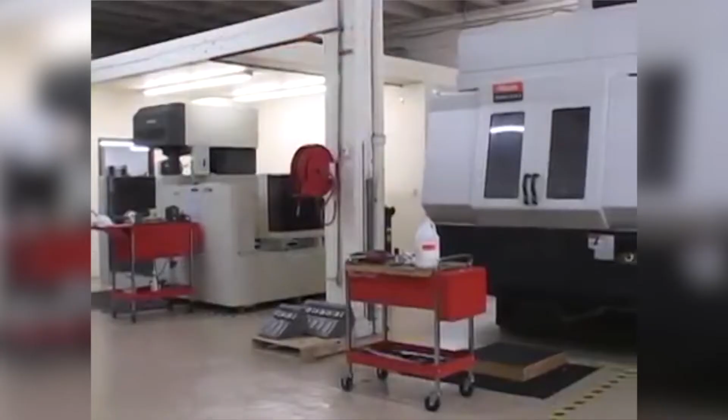Five-Axis Industries and sister company Ellstrom Racing trace their roots back to 1960 as part of the Ellstrom Manufacturing Company. Started by Erick Ellstrom Sr., the company established a legacy of innovation, performance, and a winning attitude that is apparent today.

Ellstrom Racing came on the scene in the early 90s to dominate the highly competitive, high-risk sport of unlimited hydroplane racing. These 30-foot powerboats, weighing over 7,000 pounds, are more like airplanes than boats. Most of the time, the propeller is the only part of the boat that is in the water.

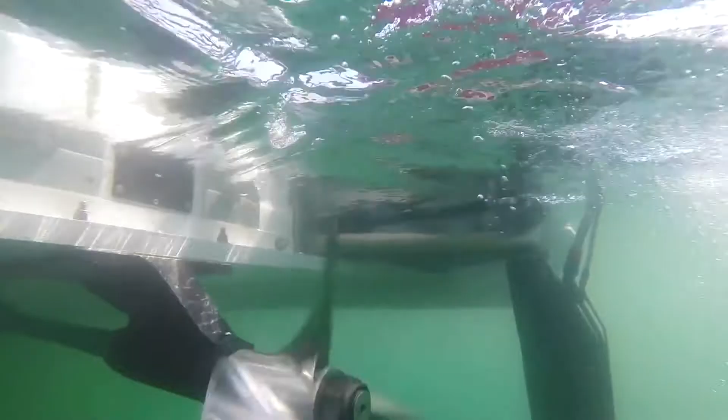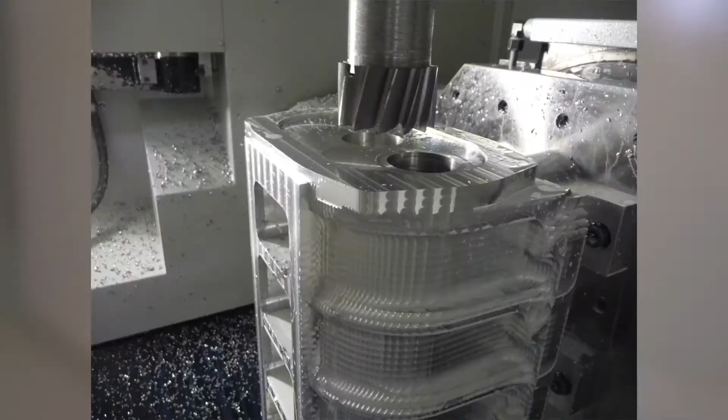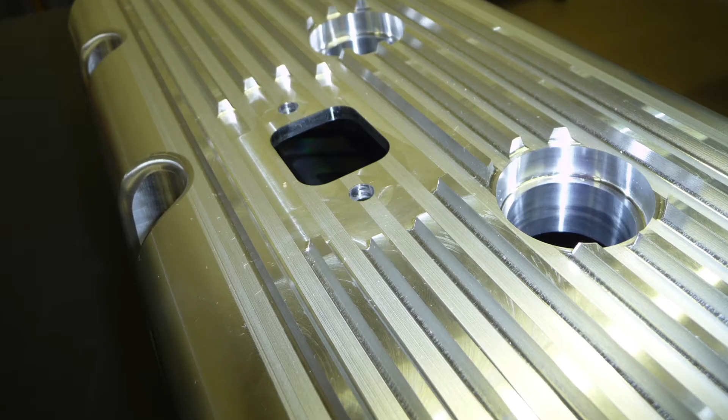When it came to raising the bar on the status quo in unlimited hydroplanes, Ellstrom Racing knew they needed to innovate and improve the design and manufacturing of high-quality components that stand up to the demands of the sport. So they started Five-Axis Industries, which in the beginning was essentially a hobby shop capable of making difficult-to-manufacture parts from hard metals, including titanium and stainless alloys.

It was not long before Five-Axis started making specialty performance parts for other teams, and today they build props for most of the unlimited hydroplanes racing.

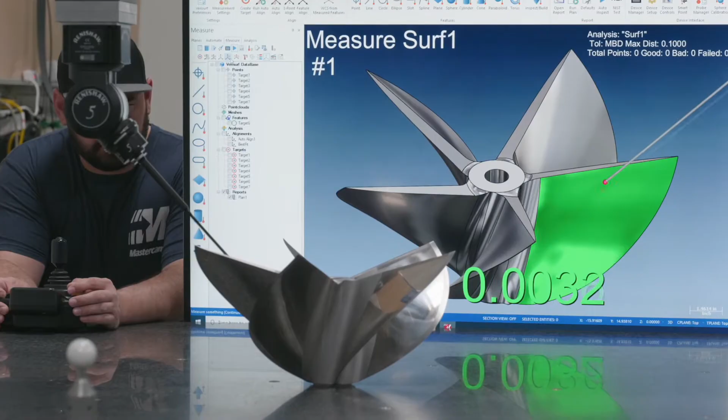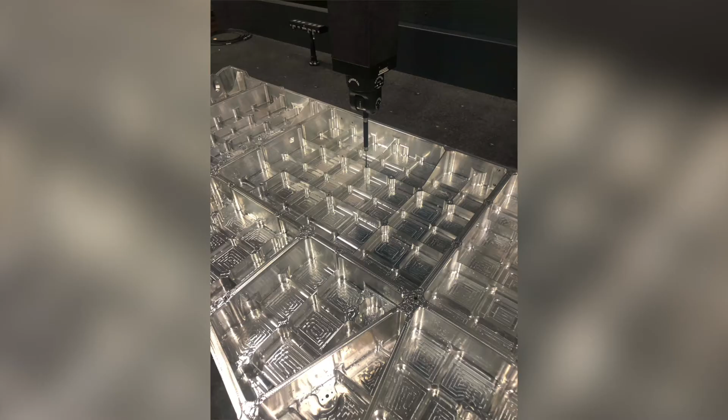Five-Axis cut their teeth in the high-performance marine industry, producing hard-to-manufacture parts, and gained a reputation as the ones that can get it done when no one else can. This propelled them into producing parts for other demanding applications like aerospace, producing large structure parts, as well as high-performance components, including propellers, blowers, gas turbine engine parts, thrust cones for rockets, and air turbine assemblies.

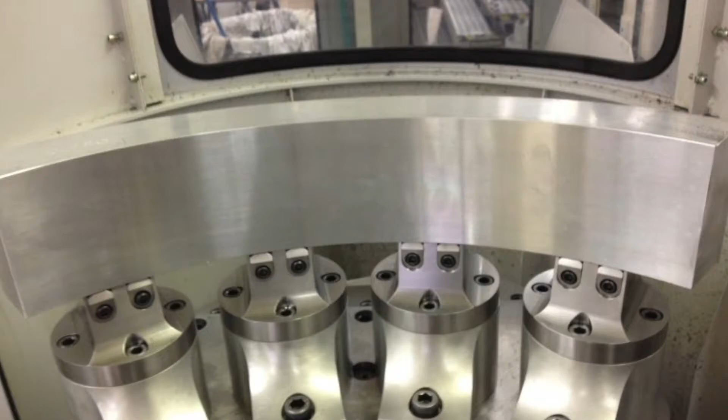Most of their design work, especially high-performance engine components, is also done using Mastercam and its integration with SolidWorks. They are capable of working with other CAD formats such as CATIA, Siemens NX, PTC Creo, and others as well.

Five-Axis realizes real digital continuity in the design-build process by integrating computer-aided inspection, or CAI, to the mix. This ensures preservation of a digital twin and feeds downstream applications. Computer-aided inspection is provided by Verisurf Software.

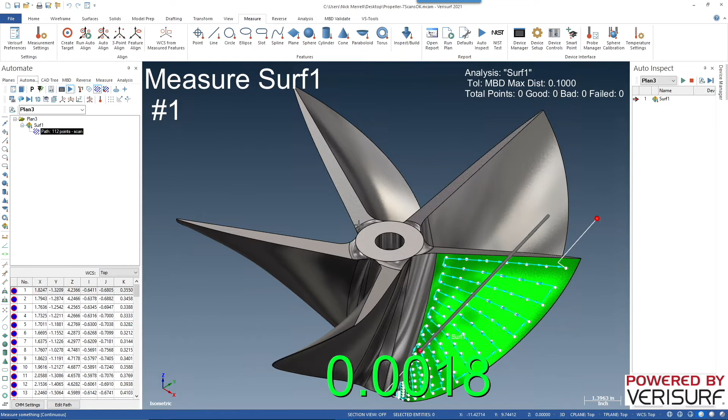Being model-based and built on top of the Mastercam platform, Verisurf allows the team at Five-Axis Industries to open and work with any CAD file, including intelligent models with associative GD&T to support the development of automated inspection plans. The net result is efficient quality verification regardless of CMM type, capable of producing first article inspections within minutes.

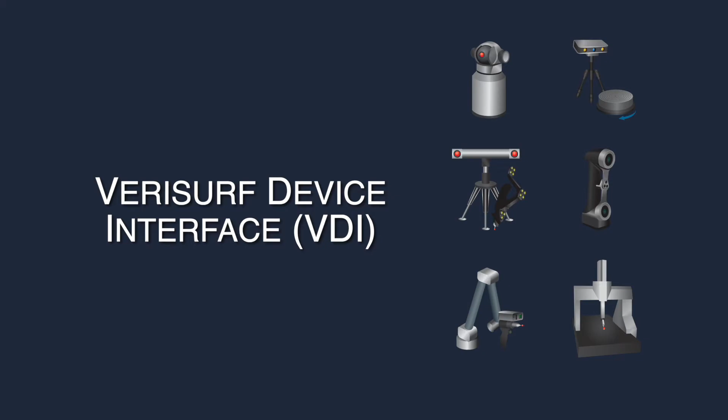The Verisurf Device Interface, or VDI, lets operators choose from any of their fixed or portable CMMs, including Five-Axis machines, to conduct quality inspections, reverse engineering, tool building, or assembly guidance using the Verisurf software. Verisurf software serves as a common measurement and inspection platform across Five-Axis Industries' manufacturing enterprise.

The entire design build team is trained to use Verisurf, which increases productivity, reduces bottlenecks, standardizes reporting, and lowers overall software and training costs. Regardless of measurement hardware device, everyone uses the same software.

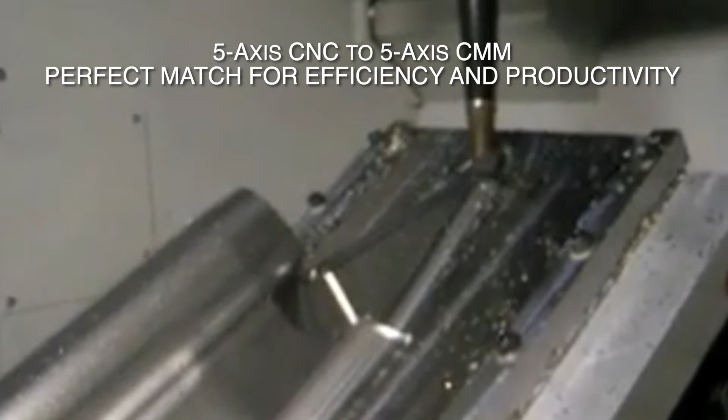Five-Axis is in their name, so it should not be a surprise to know the company has been using Five-Axis machining capabilities for more than 20 years. Machining complex shapes and features, such as propellers and other helical-shaped parts, are easier and more accurately machined using Five-Axis technology. Five-Axis machines are also easier to set up with fewer clamp changes. In short, Five-Axis capabilities are all about moving the part less and articulating the machine to move around the part.

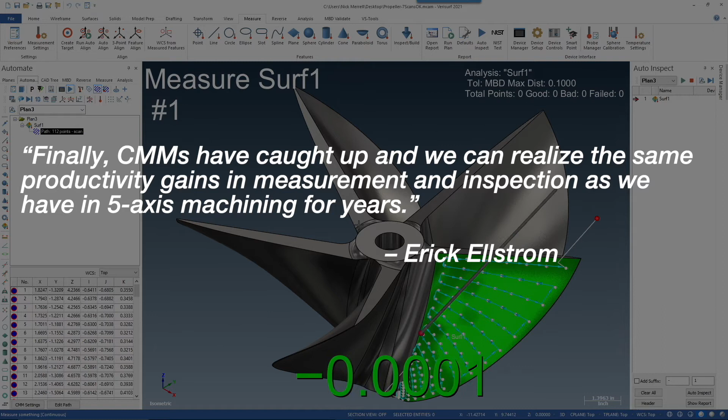We were an early adopter of Five-Axis machining, said Ellstrom. Finally, CMMs have caught up and we can realize the same productivity gains in measurement and inspection as we have in Five-Axis machining for years.

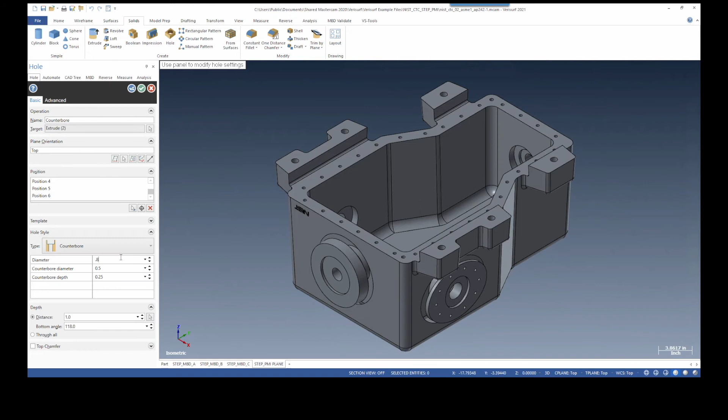Five-Axis workflow from machining through quality verification just makes common sense, reducing overall cycle time for each process by as much as 50%. Verisurf software increases overall measurement and inspection productivity from CMM plan creation through execution, with the unique ability to create a single inspection plan that can be run on any measurement device across the manufacturing enterprise, including Five-Axis CMMs.

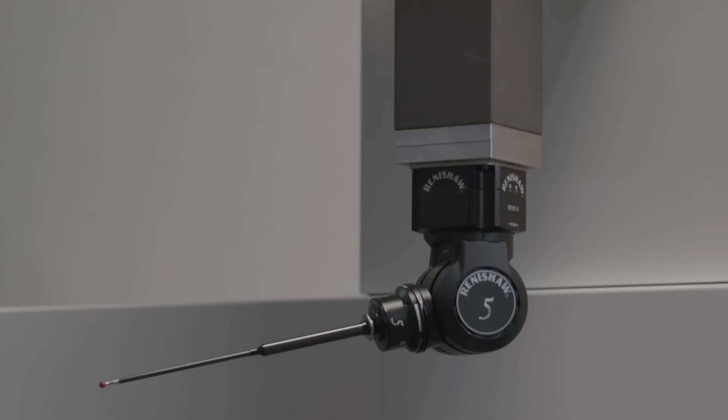The team at 5-Axis Industries currently uses the Renishaw PH20 5-Axis touch trigger probe and is considering upgrading their primary CMM to the Renishaw REVO 5-Axis scanning probe, which will enable them to perform continuous scanning of complex surfaces for enhanced inspection and reverse engineering purposes.

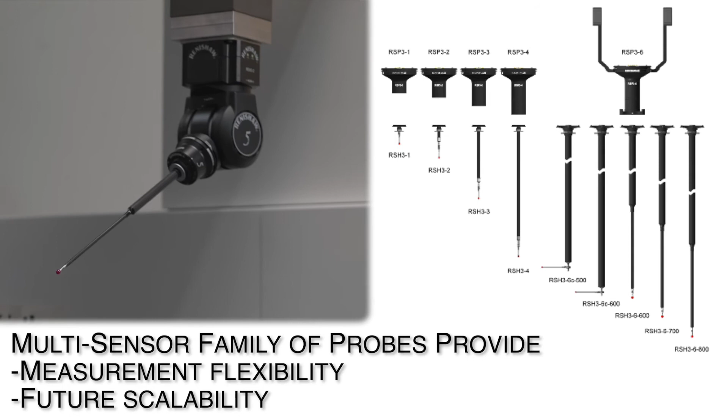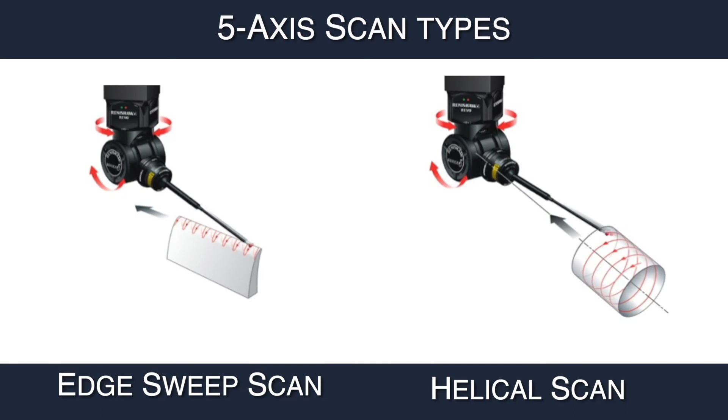Verisurf Software seamlessly supports the entire line of Renishaw probe heads, including the PH20 5-Axis touch trigger probe and the REVO 5-Axis continuous contact scanning probe. In addition to the 6 standard Renishaw scan patterns, Verisurf has developed 3 exclusive scan patterns to easily scan special features like pockets, curves, and spirals.

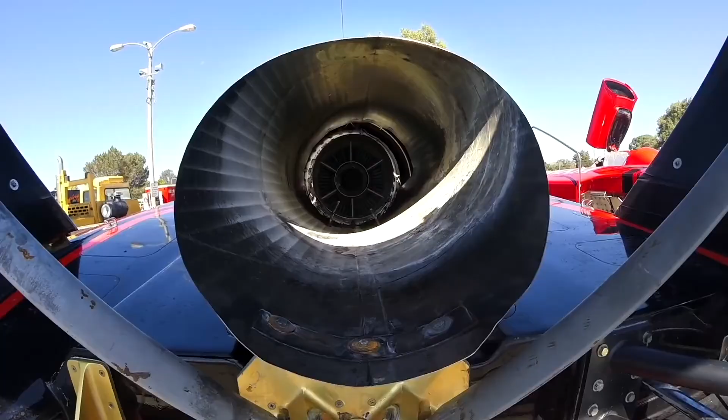Change is the only constant in performance manufacturing. In recent years, 5-Axis has grown to include more high-stress applications associated with aerospace and spaceflight in particular. In addition, Ellstrom Racing has expanded from the water to the desert, building and racing modified pro-turbo UTVs in one of nature's harshest environments. As you may have guessed, Ellstrom Racing is consistently among the top finishers.

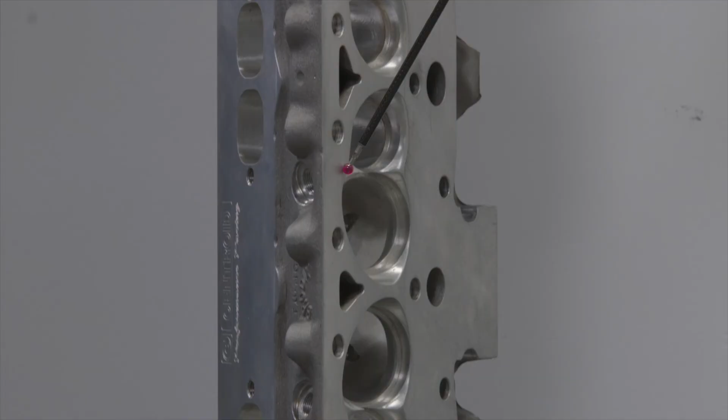Though the business has expanded and shifted a bit, the design and build process has remained constant. The company is dedicated to Verisurf and a model-based environment that maintains digital continuity from beginning to end, with the CAD model serving as the design, manufacturing, and quality inspection authority.

While Mastercam is our preferred CAD/CAM platform, Verisurf Software closes the digital loop and verifies every part we build, said Eric Ellstrom. For us, Verisurf is the final say on quality.